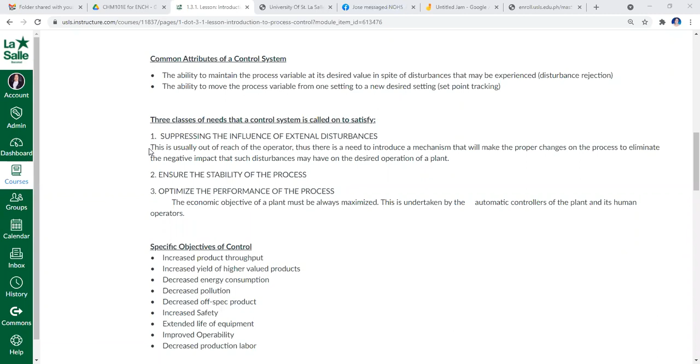Okay, so these are the important characteristics of a control system. Now, there are three classes of needs that a control system is called to satisfy. Excuse me. So number one is suppressing the influence of external disturbances. I think this is self-explanatory. This is usually out of the reach of the operator. Thus, there is a need to introduce a mechanism that could make the proper changes on the process to eliminate the negative impact that such disturbances may have on the desired operation of a plant. Since these external disturbances are usually out of the control of the operator, your control system should be able to suppress their influence on your system.

The number two need that your control system should address is to ensure that your process would still be stable. So ensure the stability of the process, even if it is experiencing external disturbances. Your control system, not the process, should have the capability to ensure that even though your process is subjected to external disturbances, it would still be stable. Okay? Or it has the capacity to return the value of the controlled variable to its set value.

Then optimization is the last. So optimize the performance of the process. This is the third need that your control system should address. So the economic objective of the plant must always be maximized. And this is undertaken by the automatic controllers of the plant and its human operator.

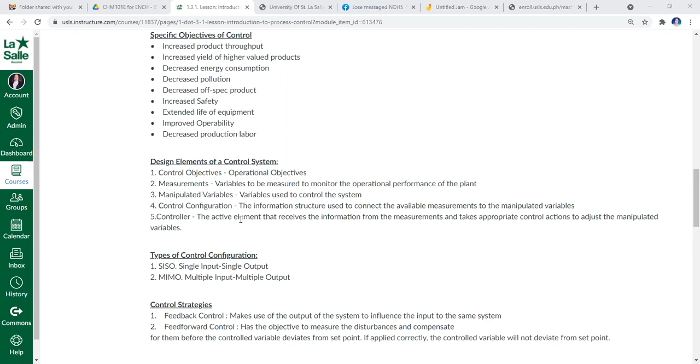There's a mention here about the control configuration. Your control configuration could either be a SISO, a single input, single output. This seldom happens unless your system is very simple. Most of the time, the control configuration is MIMO, multiple input, multiple output.

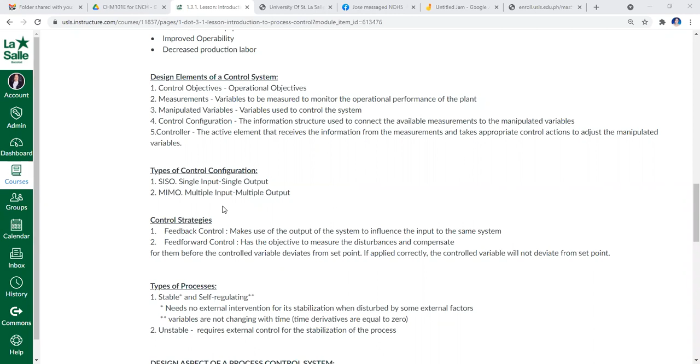Now, as to control strategies, in the end term, we have the feedback control and we have the feed forward control. Feedback control, I think you know feedbacking. You already have something, and that particular thing tells you what should be done, because there's already something to be acted upon. So the feedback control makes use of the output of the system to influence the input to the same system.

So in the case of students, if your score is low and it's given to you, it tells you that you need to study more. So that's feedback. You have something to act on, and that's your score. You have something that was measured already or tested.

In the case of feed forward, this is a kind of system that has the objective to measure the disturbances and compensate for them before the control variable deviates from the set point. If applied correctly, the control variable will never deviate from the set point. Your feed forward control does not measure the value of the control variable, but rather measures the disturbance to which your system is subjected. Based on that value of the disturbance, it acts in advance, so that what is going to happen will not happen.

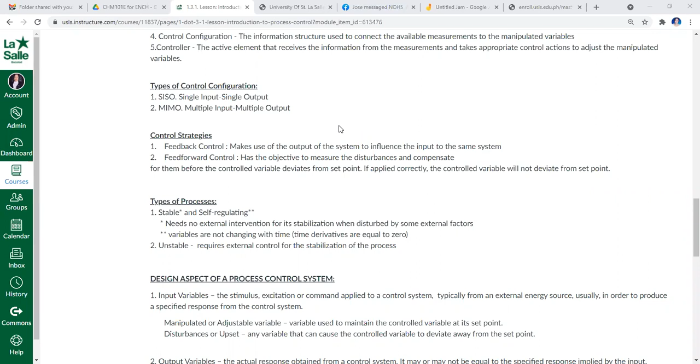Oftentimes, the kind of control that is present in the industries is still feedback control or a combination of feedback and feed forward. So there is always this feedback control that is being applied together with feed forward control.

Now, as to our types of processes, since we'll be testing for stability later on, we have the stable, or what we call the self-regulating processes. You have one asterisk here for stable. Meaning if your process is stable, there is no need for external intervention for its stabilization. Your process is said to be stable if, even if it is subjected to an external disturbance, no external intervention is to be done.

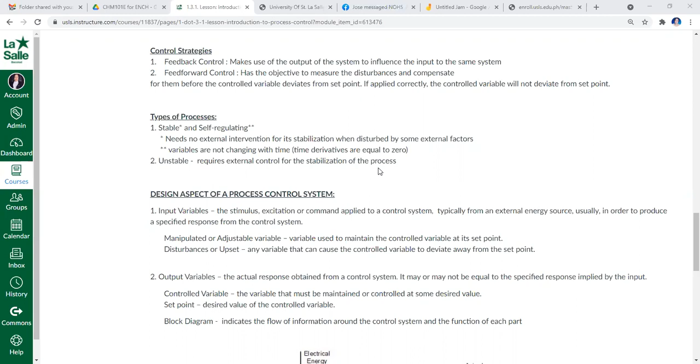The opposite of the stable and the self-regulating processes are the unstable processes. So in here, external control is needed for your system to go back or to stabilize itself again. So there has to be an external thing to be done. That way your system can go back to its original state.

Now, in the design aspect of a control system, we need the input variables, and the input variables are classified either as the manipulated or adjustable variables and the disturbances, or the other term for this is the upset. The disturbances and the upset are those that are already outside of the control of anybody. So any variable that can cause the controlled variable to deviate away from the set point is your disturbance or upset. Whereas the manipulated or adjustable variable is the variable that is used to maintain the controlled variable at its set value or set point. These two are classified as input variables.

The stimulus, the excitation or command applied to a control system, typically from an external energy source, usually in order to produce a specified response from your control system. So input variables. As for output variables, we have two also. We have the controlled variable and the set point. These are output variables. So the actual response obtained from the control system is the output variable. It may or may not be equal to the specified response implied by the input.

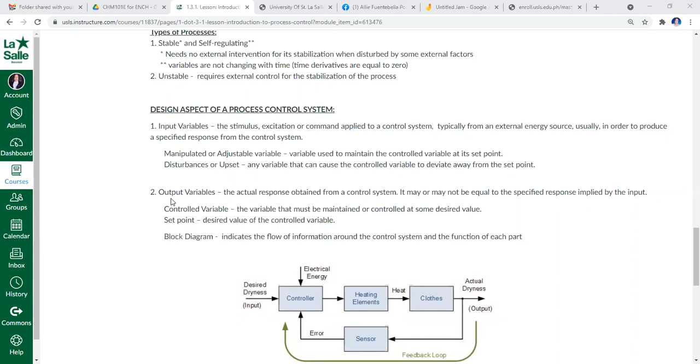So controlled variable, we know already. This is the very reason why we have process control, because we want to control a certain variable, a process variable. So the variable that is to be maintained or controlled at all times. The set point is the desired value of the controlled variable. So these two are considered as output variables.

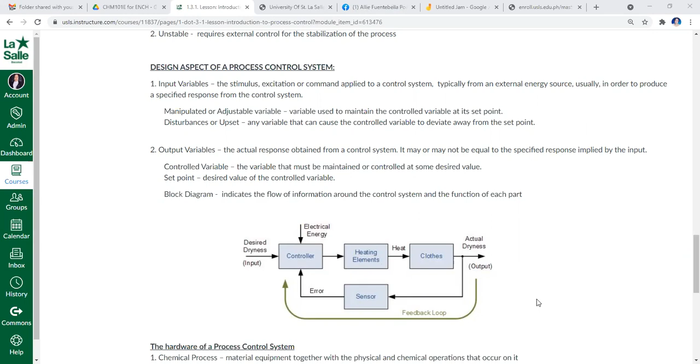In the end term, you will be given a block diagram that doesn't look like this, but it has transfer functions inside these blocks, transfer functions of these particular elements. And from the transfer function of the elements in the blocks, you will have the overall transfer function of the entire system that is being depicted by the block diagram. So this is a block diagram.

You have here the controller, you have the heating elements here, you have the clothes here in the case of drying of clothes, and you have the sensor that measures the moisture content of the clothes. So the sensed moisture is returned into the controller. The controller tells your heating element whether there's a need for more energy. That way the clothes will dry up to the desired moisture content, or the controller tells your heating elements to slow down or lessen the amount of heat that is being used to dry the clothes.

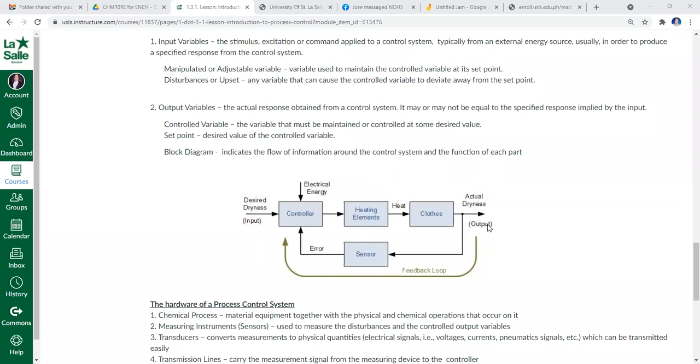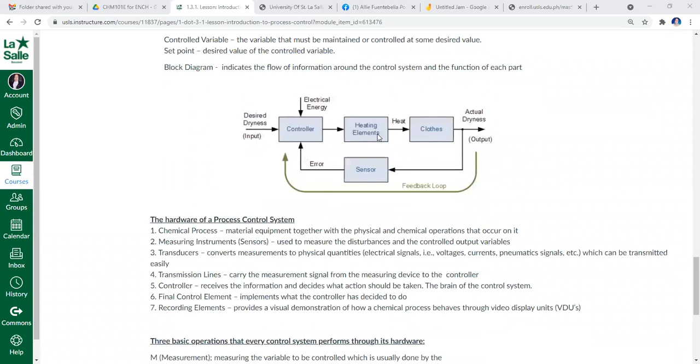So this is a feedback control system because you have something that is being sensed, and this sensing is used to manipulate the heat that is being supplied to your clothes so that your clothes will dry up. Okay, a simple block diagram for a simple clothes dryer. You also have a block diagram example, but it's simpler than this one, in Coughanowr or other books that are available on the internet.

So the hardware of process control, these are the design aspects of process control. When you speak of the hardware, these are the things that really comprise your control system. We have the process, the sensors, the transducers, the transmission lines, the controller, the final control element, and the recording element. So there's 7 of them. This is the hardware for your control system.

So the process is the one wherein you're going to control something: material equipment together with the physical and chemical operation that occurs on it. We have something to control because of the existence of this chemical process. We have the sensors, used to measure the disturbances and even the controlled output variables. The transducers, these are very important. We will go to this in detail in the end term; they convert the measured values to physical quantities. How do I explain this?

The brain of the control system is, of course, like a computer. It can process or interpret values, but if you're sensing temperature, your controller doesn't take in temperature directly. So it's converted in the form of signals that your controller can understand, because your controller cannot understand temperature, cannot understand pressure. It can only understand voltages, currents, air signals like pneumatic signals.

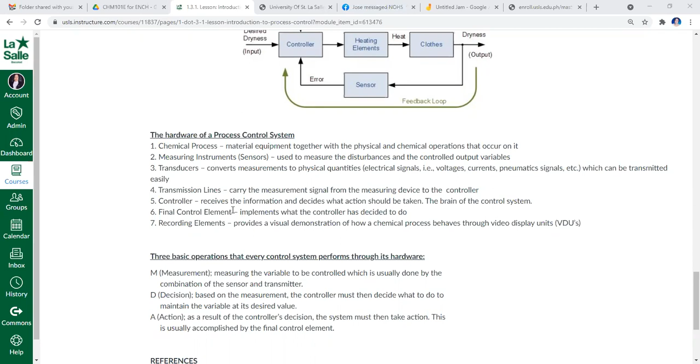Now, if we sum up the three basic operations that your control system has to perform through these 7 hardwares, it could be memorized as MAD or MDA. I tell my students, just remember MAD. Your control system has to measure, decide, and act on what it has decided to do. That is how control is effected on a process through these 7 hardwares: measure, decide, act. I just rearranged it so it's easy to remember, but it's MDA.

So this ends the first module for process control. Even in pre-COVID time, I can finish the entire thing in less than an hour. So in our case, we did it also in less than an hour because it's all terms. It's all things that only needed to be explained and discussed. It gives you more or less the overview of the importance of the modeling, the mathematical modeling, or the mathematical representation of the physical systems that we will be modeling later on. That way control is effected on a particular process variable.